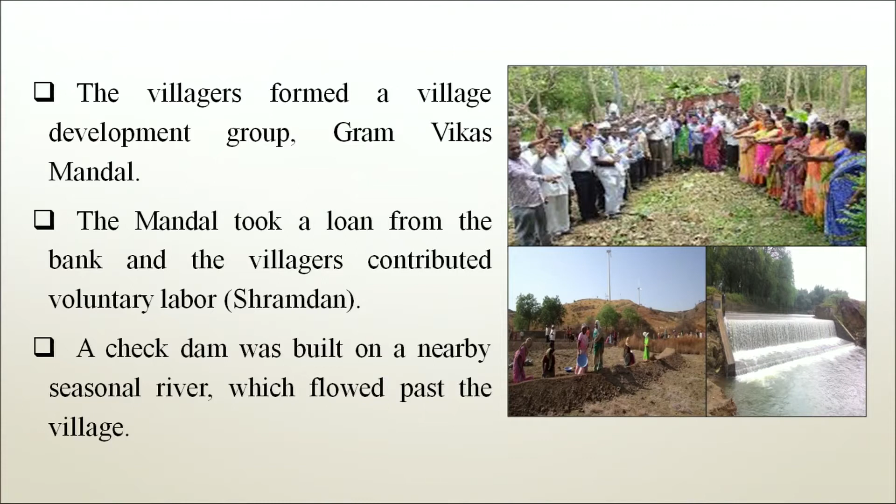The Mandal took a loan from the bank, and the villagers contributed voluntary labor, that is Shramdan. A check dam was built on a nearby seasonal river that flowed past the village. Apart from the dam, the villagers also undertook a micro watershed project. Due to these water retention structures, the villagers now have sufficient drinking water, and 400 hectares of land which earlier lay barren has come under irrigation.

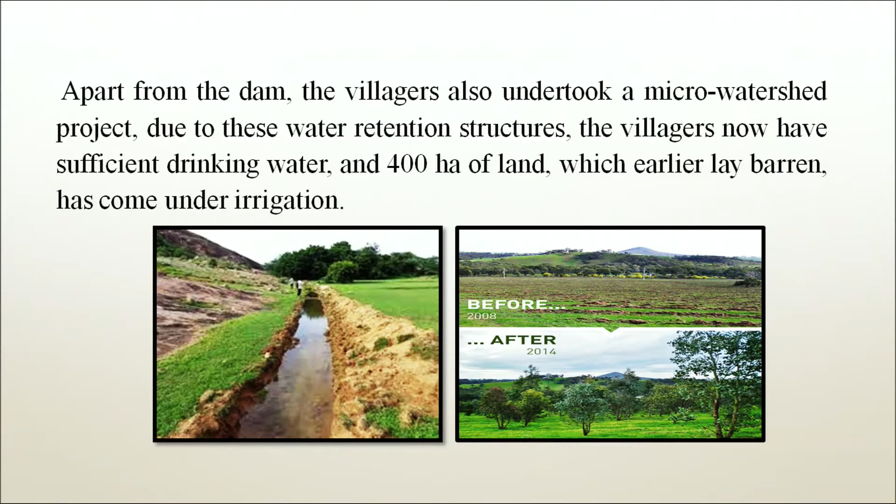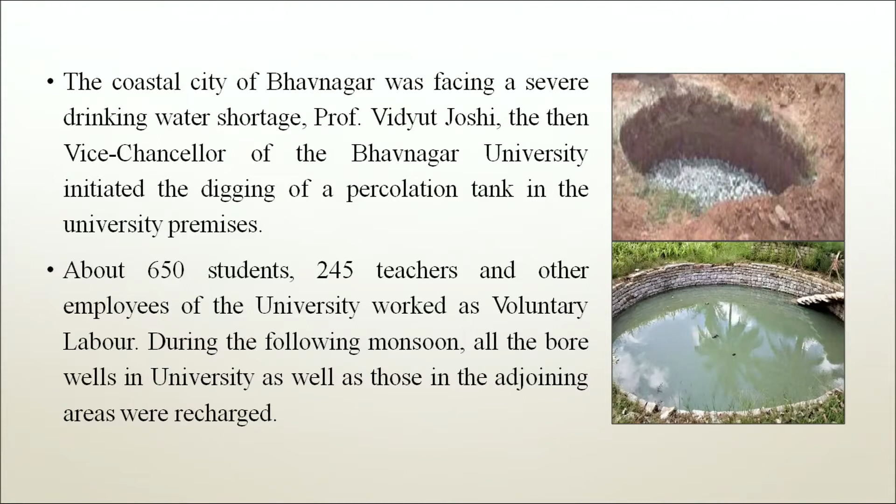The coastal city of Bhavnagar was facing a severe drinking water shortage. Professor Vidyut Joshi, the then Vice Chancellor of Bhavnagar University, initiated the digging of percolation tanks in the university premises. About 650 students, 245 teachers and other employees of the university worked as voluntary labor. During the following monsoon, all the bore wells in the university as well as those in adjoining areas were recharged.

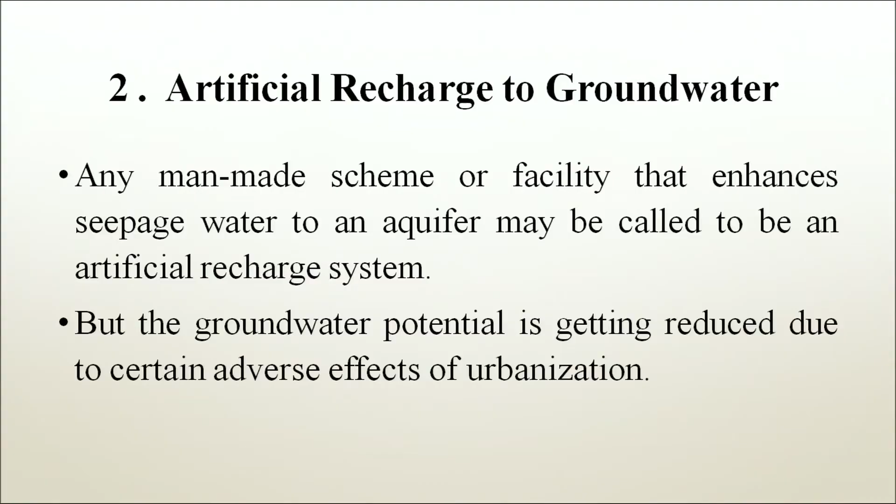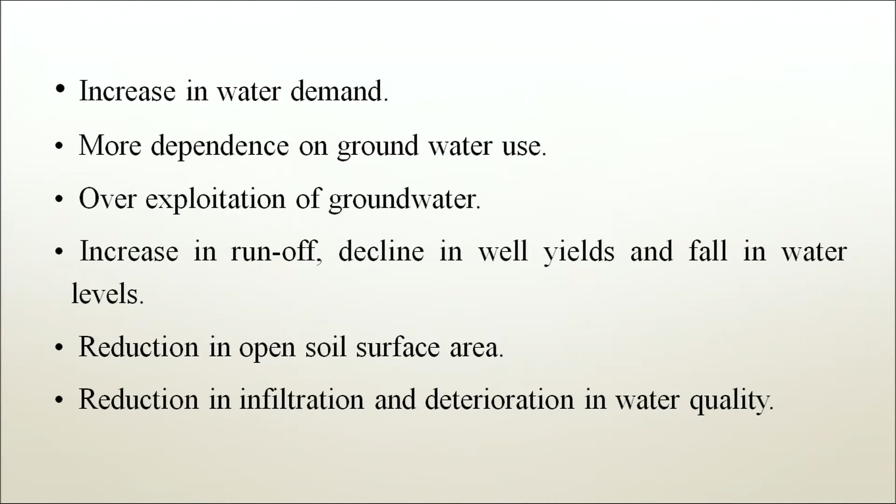Now we will discuss artificial recharge to groundwater. Any man-made scheme or facility that enhances seepage of water to an aquifer may be called an artificial recharge system. The groundwater potential is getting reduced due to certain adverse effects of urbanization, some of which are: more dependence on groundwater use, over-exploitation of groundwater, increase in runoff, decline in well yields and fall in water levels, reduction in open soil surface area, reduction in infiltration, and deterioration in water quality.

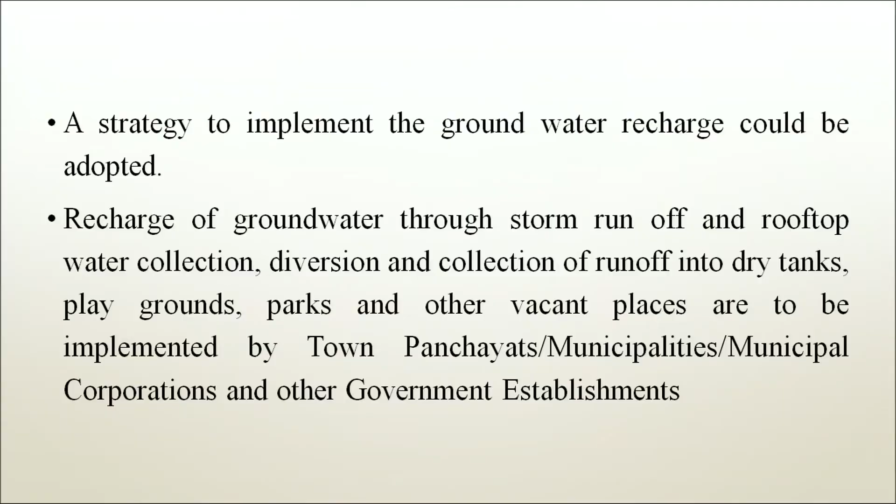A strategy to implement groundwater recharge could be adopted: recharge of groundwater through storm runoff and rooftop water collection, and diversion and collection of runoff into dry tanks, playgrounds, parks and other vacant places, to be implemented by town panchayats, municipalities, municipal corporations and other government establishments.

We will read methods of artificial recharge in urban areas: water spreading, recharge through pits, trenches, wells and shafts, rooftop collection of rainwater, road top collection of rainwater, and induced recharge from surface water bodies.

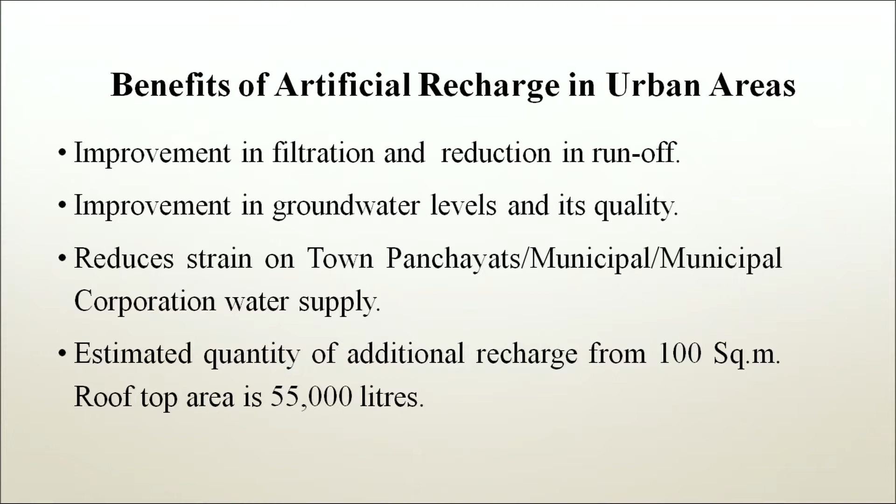Now we will discuss the benefits of artificial recharge in urban areas: improvement in infiltration and reduction in runoff, improvement in groundwater levels and its quality, and reduced strain on town panchayats and municipal corporations' water supply. The estimated quantity of additional recharge from a 100 square meter rooftop area is 55,000 liters.

Next we will discuss government efforts on water conservation.

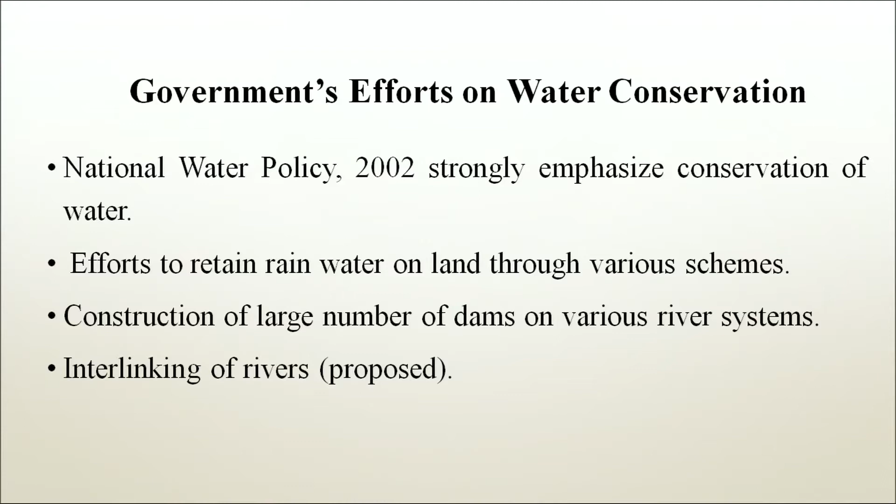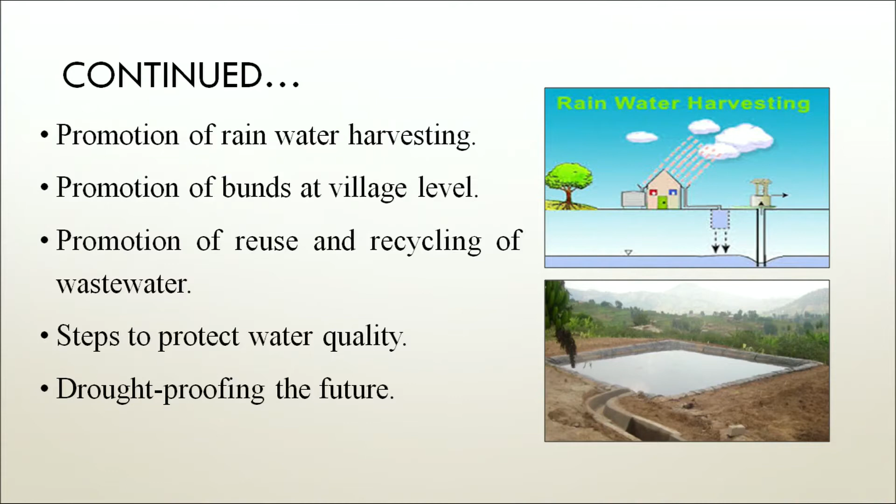The National Water Policy 2002 strongly emphasized conservation of water, efforts to retain rainwater on land through various schemes, construction of large numbers of dams on various river systems, and interlinking of rivers. It proposed promotion of rainwater harvesting, promotion of bunds at village level, promotion of reuse and recycling of wastewater, steps to protect water quality, and drought proofing for the future.

The Indian River Interlinking is a proposed large-scale civil engineering project that aims to effectively manage water resources in India by linking Indian rivers through a network of reservoirs and canals, reducing persistent floods in some parts and water shortages in other parts of India.

The interlinking project has been split into three parts: a northern Himalayan river interlinking component, a southern peninsular component, and, starting 2005, an intrastate rivers linking component. The project is being managed by India's National Water Development Agency under its Ministry of Water Resources.

Temporary cutbacks or permanent operating adjustments can help conserve water. First, we will talk about permanent conservation methods.

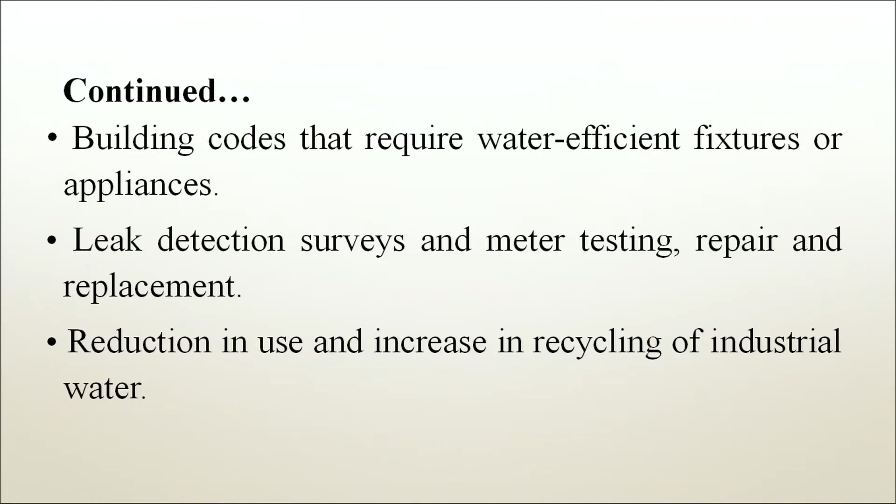These include subsidizing the use of water-efficient faucets, toilets and shower heads, public education and voluntary use reduction, billing practices that impose higher charges for higher water use, building codes that require water-efficient fixtures or appliances, leak detection surveys and meter testing, repair and replacement, and reduction in use along with increased recycling of industrial water. Now coming to temporary cutbacks, these include reduction of system-wide operating pressure, water use bans, restrictions and rationing.

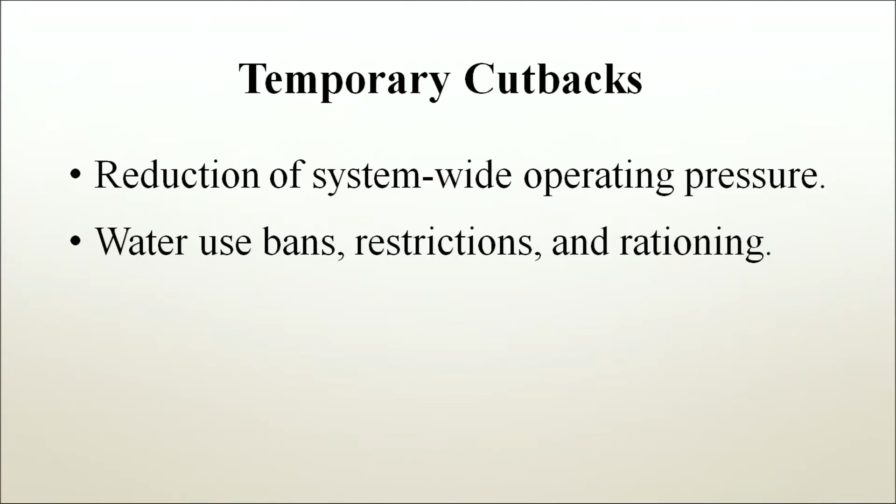India's water policy gave overriding priority to drinking water. Urban development projects are required to make provisions for drinking water.

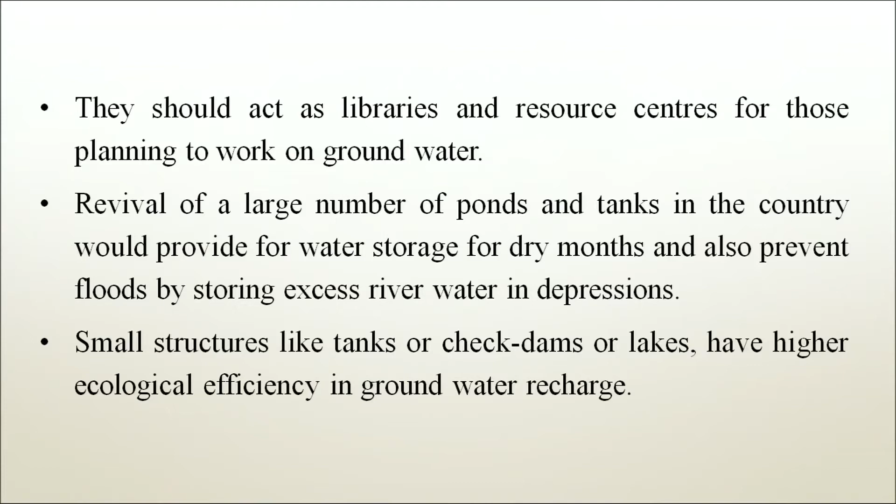Revival of a large number of ponds and tanks in the country would provide for water storage during many dry months and also prevent floods by storing excess river water in depressions. Small structures like tanks, check dams or lakes have higher ecological efficiency in groundwater recharge.

Techniques like rooftop rainwater harvesting should be promoted in urban areas. There is a strong need to create awareness about water conservation among the urban youth. Commercial media and regular airtime on national channels discussing issues of water management and their success stories is an effective way to promote water conservation.

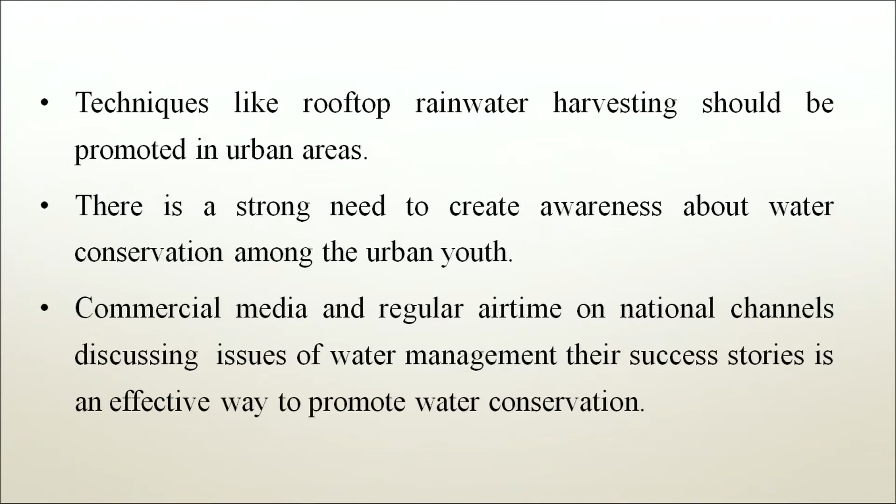In many parts of the country, water is polluted by the discharge of domestic or industrial effluents. There is an urgent need to implement anti-pollution laws. Quality of groundwater is a very important concern, as it supports more than 50% of agriculture even today.

Now the time has come when we will have to revisit traditional solutions for water conservation. Indian communities have long been aware of the dependence of their lives on the natural resources around them. You all must be aware of the Chipko movement, which involved local people physically embracing trees to prevent loggers from cutting them, under the leadership of environmentalist Sundar Lal Bahuguna.

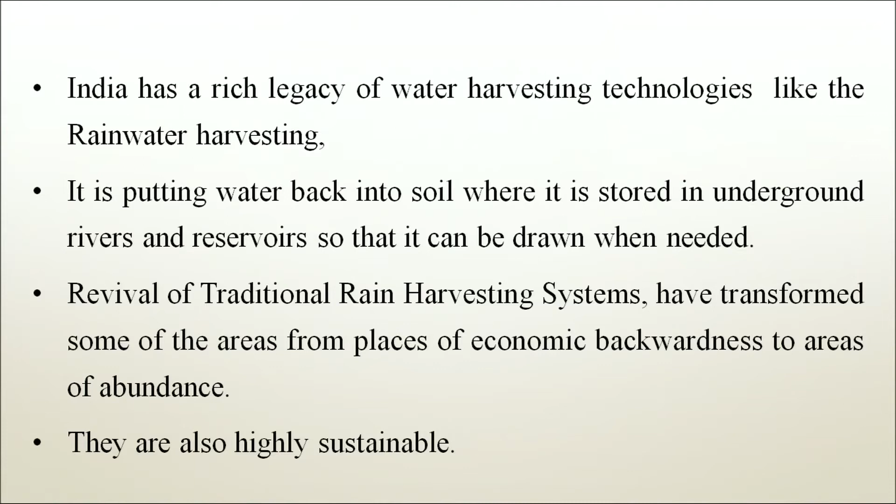India has a rich legacy of water harvesting technologies like rainwater harvesting. It involves putting water back into the soil, where it is stored in underground rivers and reservoirs so that it can be drawn when needed. Revival of traditional rain harvesting systems has transformed some areas from places of economic backwardness to areas of abundance. They are also highly sustainable.

We must rejuvenate our traditional knowledge and tap the traditional system of resource management to suit our present day needs. Modern communities the world over should therefore be encouraged to look at time-tested traditional methods of resource management. There are some simple water saving methods to conserve water, because it is the right thing to do. We can follow some simple tips.

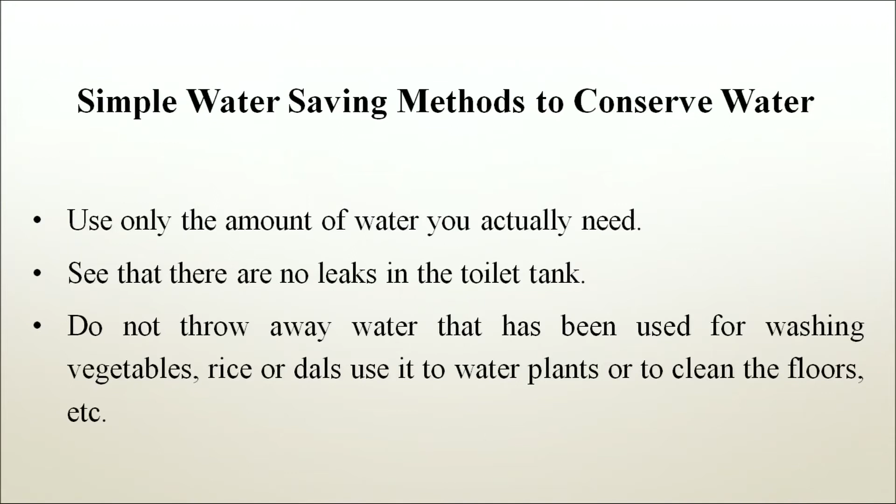Use only the amount of water you actually need. See that there are no leaks in the toilet tanks. Do not throw away water that has been used for washing vegetables, rice or dal; use it to water plants or to clean the floor. Make sure that your home is leak free, as many homes have leaking pipes in and around them.

Form a group of water conscious people and encourage your friends and neighbors to be part of this group. Promote water conservation in community newsletters and on bulletin boards, and encourage your friends, neighbors and co-workers to also contribute.

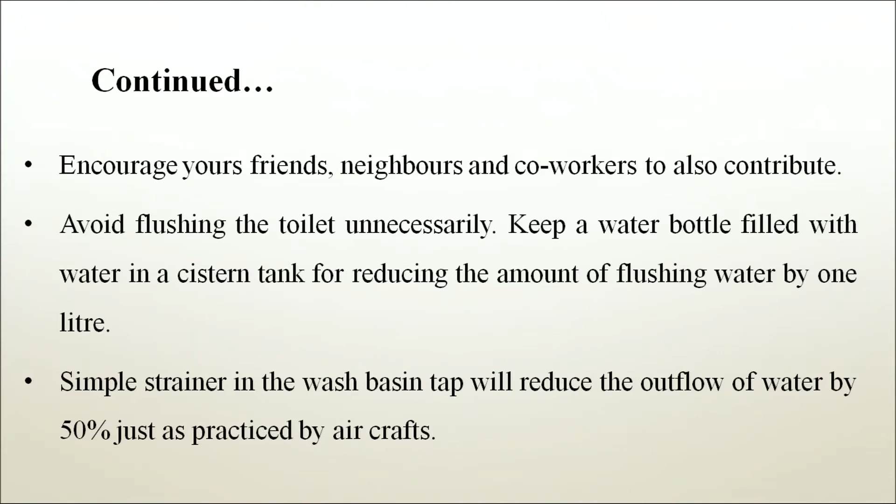Avoid flushing the toilet unnecessarily. Keep a water bottle filled with water in a cistern tank for reducing the amount of flushing water by 1 liter. A simple strainer in the wash basin tap will reduce the outflow of water by 50%, just as practiced by aircrafts. We will discuss a few other daily routine activities to reduce excess use of water in the next few slides.

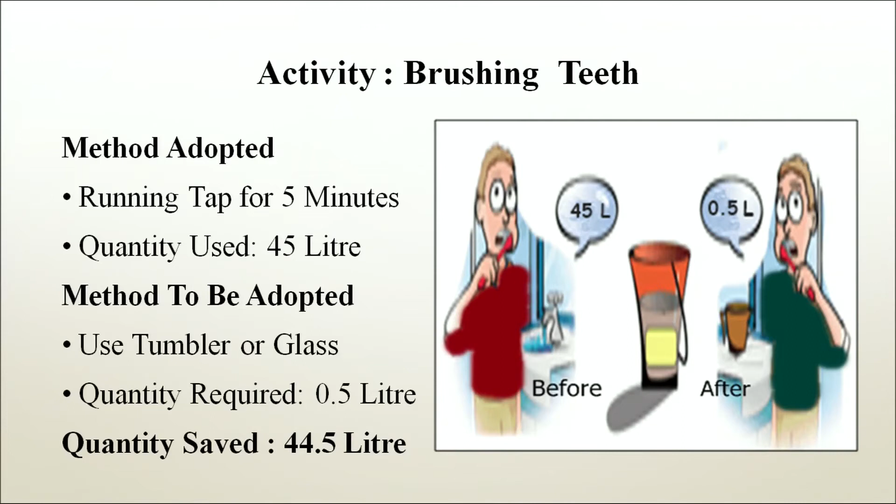First activity is brushing teeth. Method adopted: running tap for 5 minutes, quantity used 45 liters. Method to be adopted: use a tumbler or glass, quantity required 0.5 liter, quantity saved 44.5 liters.

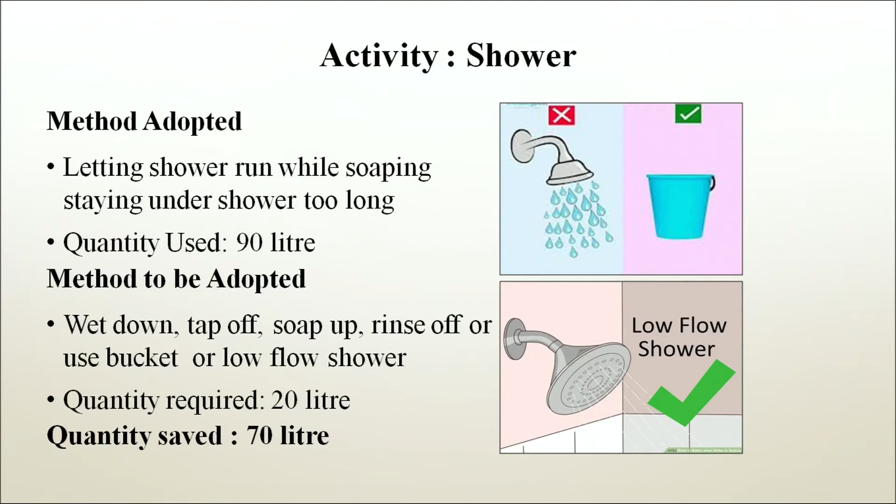Next is shower. Method adopted: letting the shower run while soaping, staying under the shower too long, quantity used 90 liters. Method to be adopted: wet down, tap off, soap up, rinse off, or use a bucket or low flow shower, quantity required 20 liters, quantity saved 70 liters.

Next, flushing toilet. Method adopted: using old fashioned large capacity cistern, quantity used 13.5 liters or more. Method to be adopted: dual system, short flush for liquid waste, full flush for solid waste, quantity required 4.5 liters and 5 liters, quantity saved 4.5 liters or more.

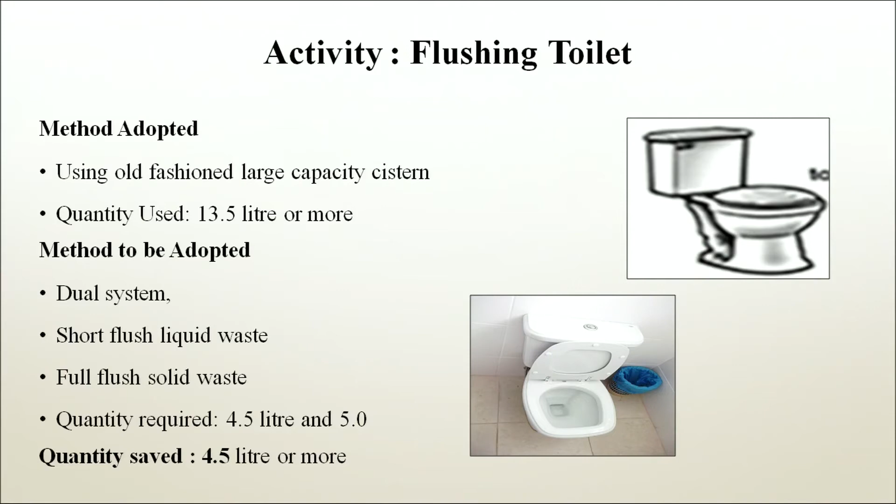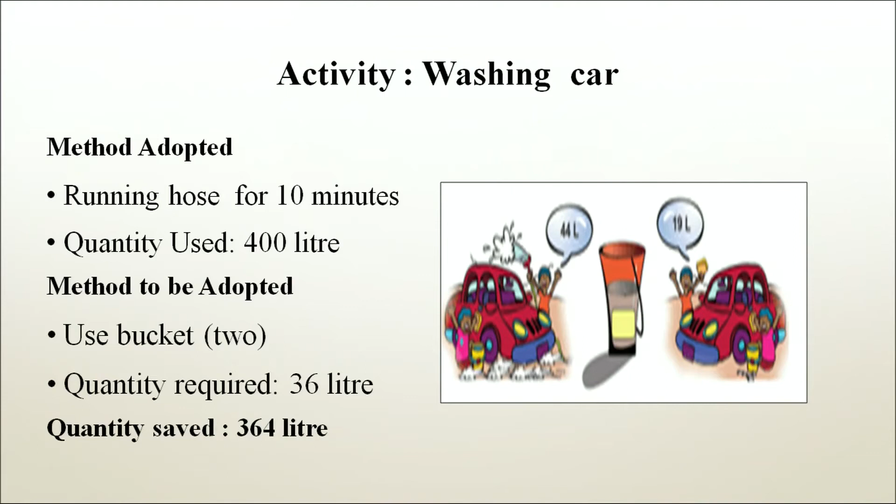Next is washing car. Method adopted: running hose for 10 minutes, quantity used 400 liters. Method to be adopted: use a bucket, 2 buckets, quantity required 36 liters, quantity saved 364 liters.

There are a few simple methods which can be used for saving water: monitor your water bill to track your family's water consumption. If your consumption is more than average, recheck your family's water use habits. Take shorter showers. Wash food, dal and vegetables in filled sinks instead of under running water. Wash a full load, fill your washing machine on a full load.

Next is reuse: collect grey water from washing machines for flushing the toilets or mopping the floor. Repair leaks, promptly repair tanks and leaking taps immediately to prevent water wastage. Half flush for liquid waste.

Now we will discuss case study 2. This study belongs to Rajasthan. The work of Tarun Bharat Sangh and its founder Sri Rajendra Singh in the district of Rajasthan can easily be summarized as watershed management. It is a two-step program: first, revive vegetation on barren hill slopes, and second, build small water catchments in the valleys and the plains.

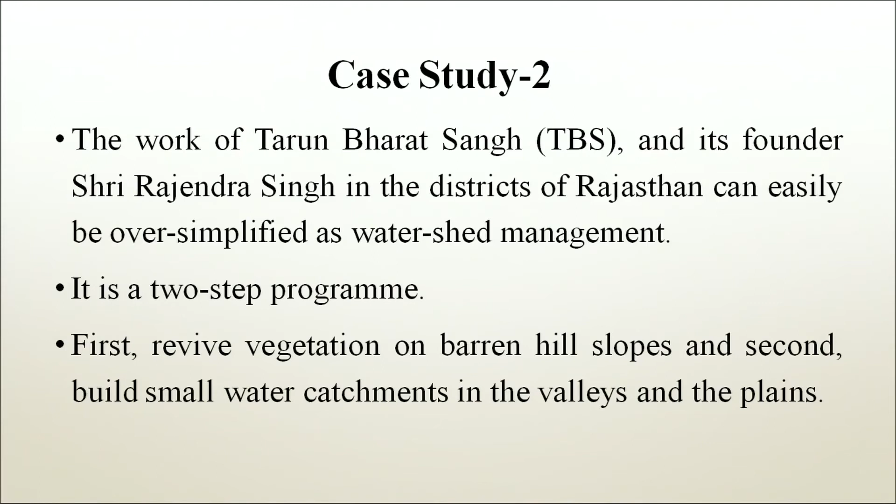The efforts resulted in dead rivers beginning to flow, agriculture possible round the year, poor villagers laboring in cities returned and families reunited. With enough water and fodder, income from animal husbandry begins to flow, nutrition levels rise and public health improves. People rid of insecurities come together to address other issues of life like education and local governance. Awareness and confidence enable microcredit schemes that lower the cost of households and help start small enterprises. When small communities like these succeed, the government itself wakes up and development becomes what it should be, ground up instead of top down.

Then the question arose, how did it happen? Well, this happened in the space of 15 years in Rajasthan. From the small village of Bikampura in Alwar district, the people-centered development model spread all over Rajasthan. Today the river Arvari, dead for 40 years, is flowing again, along with the river Ruparel, Jahajwali and numerous other rivulets.

It all began with a young man called Rajendra Singh in 1985. Tarun Bharat Sangh discovered that only people's fullest cooperation can achieve these ends. Every member of the community agrees to contribute either money or labor towards construction of a johad.

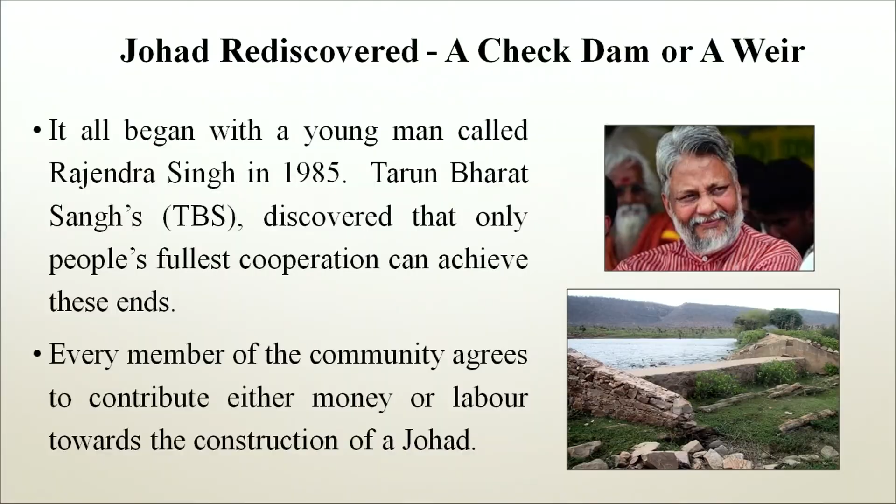The picture shows johad, one of the oldest systems used to conserve and recharge groundwater. These are small earthen check dams that capture and store rainwater, constructed in an area with naturally high elevation on three sides. A storage pit is made, and excavated soil is used to create a wall on the fourth side.

Once such conservation works are built, they become everyone's responsibility, to be guarded and maintained. Issues of use and sharing are settled before construction begins rather than later, so such works last forever, and years of deliberation recede into insignificance.

Regeneration of vegetation on the hill ensures a dependable water supply to the stream. Hills can be revived when left alone, by preventing humans from cutting mature trees and preventing cattle from nibbling sprouting stumps. TBS discussed these issues with villagers in the chosen hill areas through hundreds of hours of meetings over several months, until they all agreed to suspend browsing by cows for 3 years, goats for 5 years, and camels for 7 years.

This agreement leads to what TBS calls social fencing, which is virtual, existing only in mind. With great fanfare, elders lead villagers on a walk through the entire line of the agreed social fence, sanctified by sprinkling a mixture of sacred water and milk. Once notified, TBS found that villagers respected and policed it.

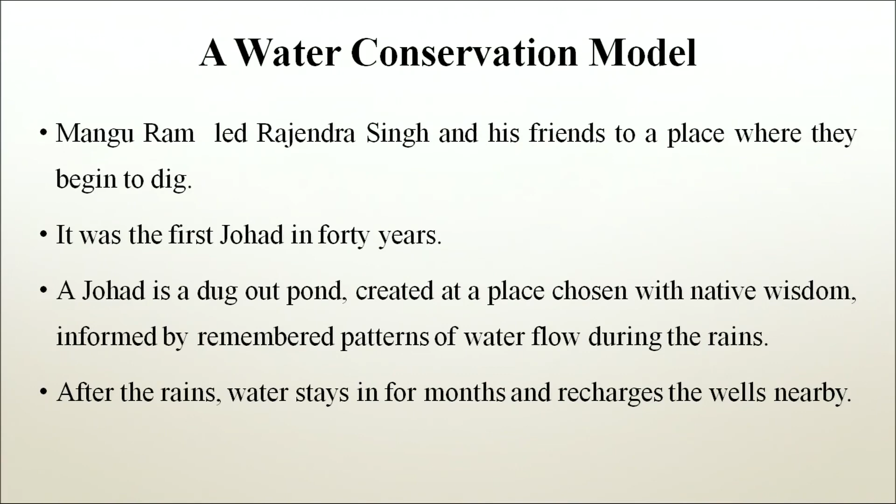When the 650th johad was dug out close to the forgotten riverbed of the Arvari, the river woke up at the next rains and began to run, providing water and life to the people of the area.

Today, all over Rajasthan, the TBS model pioneered by Rajendra Singh is spreading. There are more than 3,500 people-made water conservation structures. Villages contribute one-third of the cost of all construction.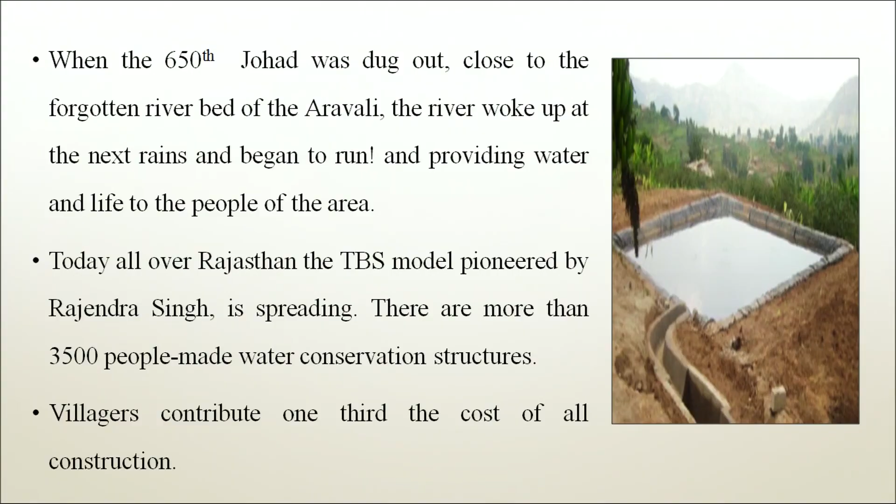Dear learners, before we wrap up, we would like to recap the main points of what we have learned. There are many examples of individual, community, and government efforts at conservation of water.

Efforts at individual and community level in Gujarat on water conservation are also famous. The effort of Tarun Bharat Sangh, led by Sri Rajendra Singh, to revive the Aravali river in Rajasthan is a world-famous example of water conservation.

A large number of dams and reservoirs created in the country are good examples of government's effort toward water conservation. There are a number of policy and regulatory initiatives taken by the government to promote rainwater harvesting and water conservation.